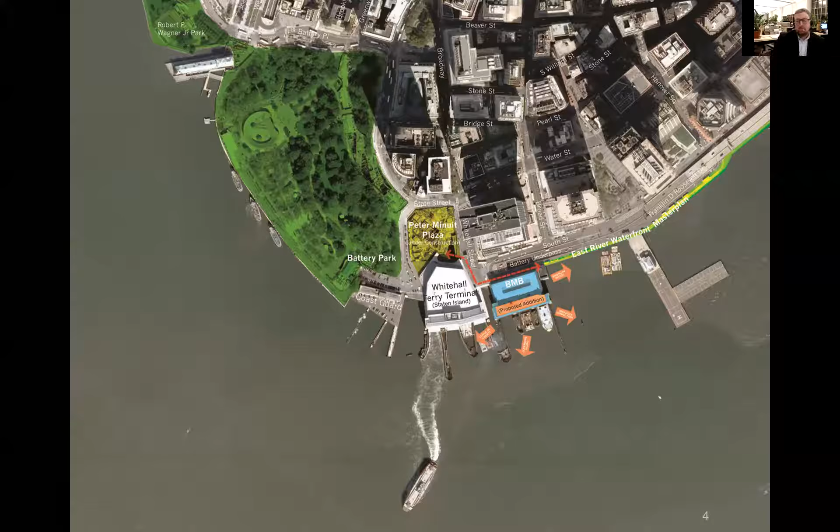So I'm going to walk through. First, it is really a story of the New York City waterfront and its long transition from industrial to recreational use. The BMB sits at the foot of Broadway at the southern tip of Manhattan, directly adjacent to the Staten Island Ferry. I'm going to walk through a little history next to help contextualize the building and the place, and plus, who doesn't love old black and white drawings and photos?

I know I do. New York City is an archipelago of islands. New York City has 520 miles of coastline, which is more than Los Angeles, San Francisco, Miami, and Boston combined.

It's really a city born of the water. The center of commerce was always the edge of the city. This wonderful view of New York Harbor from 1883 shows our site seated right at the foot of Broadway.

We all know Manhattan was settled from the southern tip up, so really it's the front door to the city. And I'd like to point out in this view that there's ships of all sizes and uses, not just commerce, but transportation, and in addition, ferries. It was really an ideal mode of transportation in this water city, especially in areas not served by mass transit.

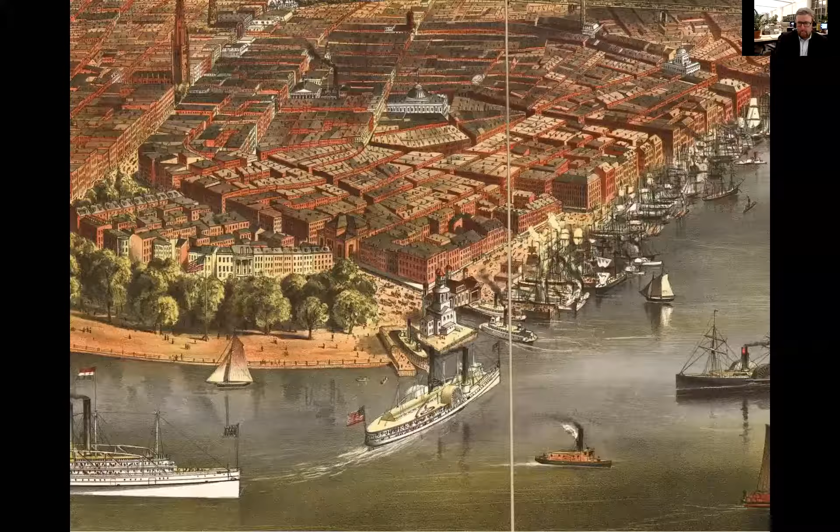Note the Brooklyn Bridge, the only bridge crossing the East River at that time, plays a role in the BMB later on. Zooming in a bit, we see the Battery Maritime Building site. And I have a quote from Herbert Halberg, who was an LPC commissioner who designated the building in 1966.

From the city's founding, the lower tip of Manhattan has always been a focal point for ferry activity, and that's played a vital role in New York City's growth and development. So the Battery Maritime Building was not the first ferry building to occupy this prominent site. You might say New York's first site.

In 1904, there were 147 ferry boats in operation in the waters around New York City, and the tremendous turn of the century boom, growth, fueled by invention, industry, and ambition. So many of the city's greatest landmarks were built during this period, and among them, the BMB. So it was a time of great investment in civic transportation infrastructure.

You see here the many bridges that occurred around the same time. The Battery Maritime Building was built in 1909, Pennsylvania Station in 1910, and Grand Central in 1913.

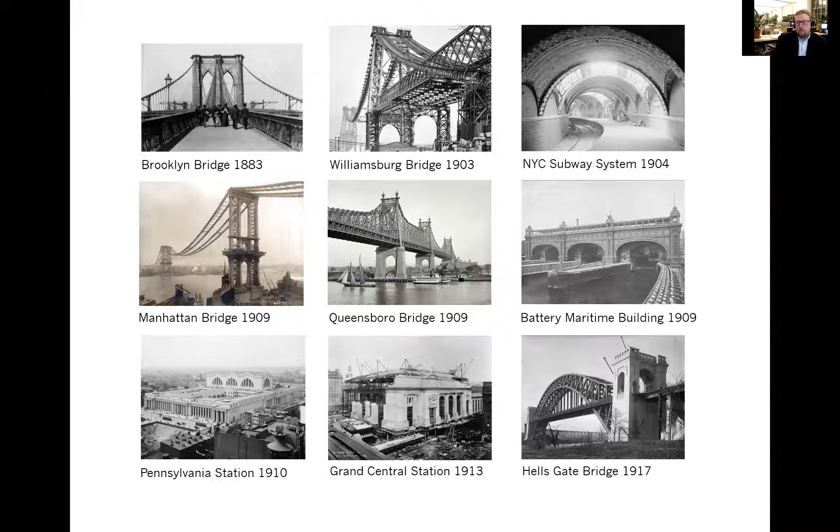Just to measure the magnitude of the Battery Maritime Building's importance, I like to imagine for a moment, if you would, that Grand Central Station has been dormant for 50 years, unused, falling apart, and was set to reopen. That is what we have at the Battery Maritime Building. But I'm getting a little ahead of the story.

In 1905, the municipal ferry system was established. There's a great book by Brian J. Cudahy, who authored Over and Back, the History of Ferry Boats in the New York City Harbor, and he referred to this time frame as a progressive takeover of the ferry system.

So the city acquired the Staten Island ferry route, along with many others, and it began to build ferry terminals all over the city. Notice here the 2 levels on the ferry boat. This plays into the BMB's design that we'll get to in a little bit.

And here it is. It was originally called the Municipal Ferry Terminal, and there were 7 slips altogether. The architect was Walker and Morris. This was their proposal in 1906.

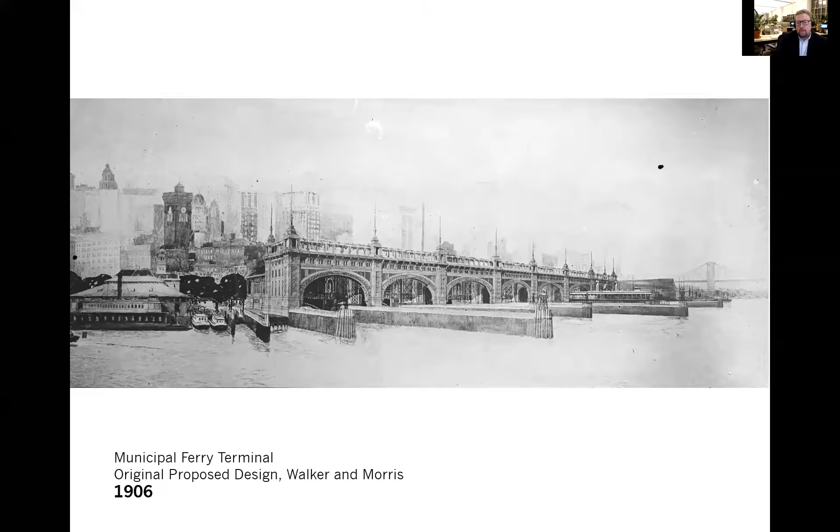The Municipal Ferry Terminal is one of those straightforward but grandiose titles, just like Grand Central, and it's really the only name that it needed with such a breadth, an impressive character. A massive 7-slip complex, the largest of the kind in America. And it was wonderfully detailed, as you'll see.

But it was never fully executed. A grand vision by talented visionary architects on behalf of an ambitious and powerful, growing city, but it was never fully realized.

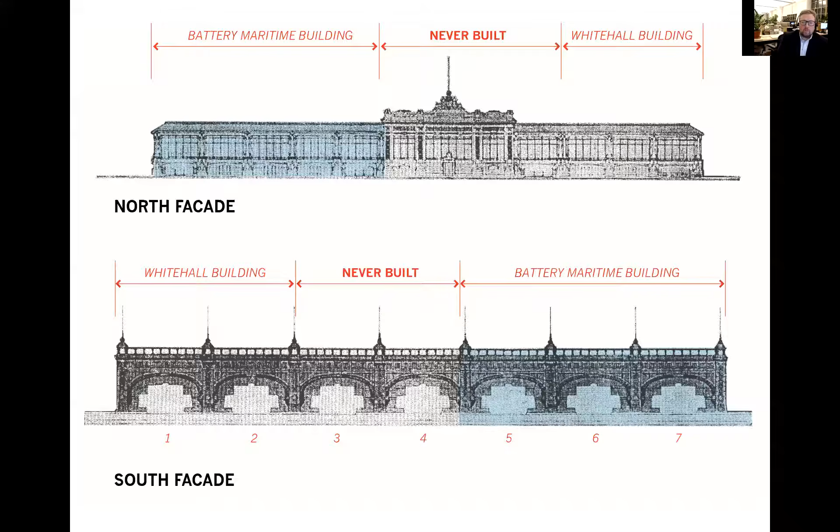The slips 1 and 2 were built, the Whitehall building, which was operating the Staten Island Ferry Terminal, and then slips 5, 6, and 7, which later became or was renamed the Battery Maritime Building. The middle was never built. So looking at this diagram, you have to understand first that BMB is just a fragment of the original intent, and because of that, the west facade in particular was always temporary, meant to connect.

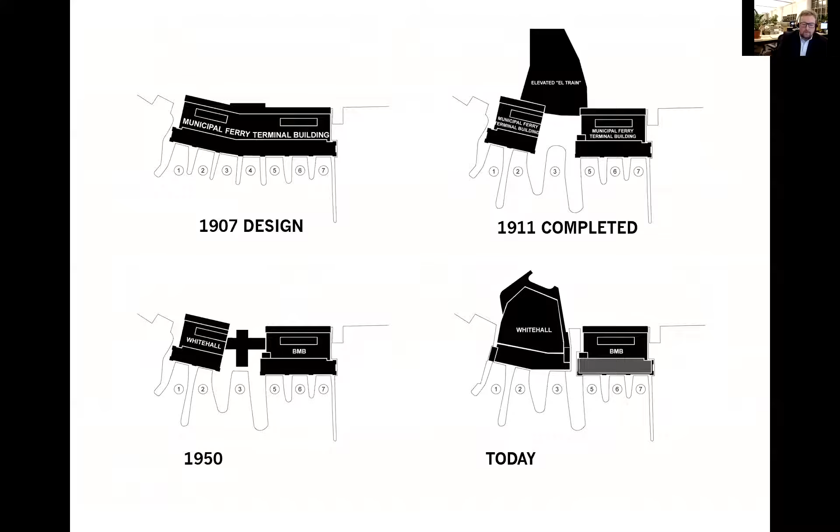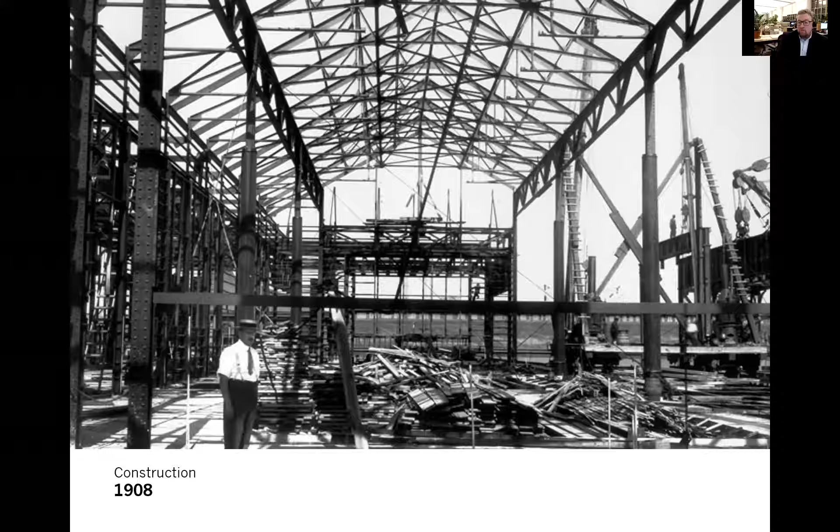This is the view of the Great Hall under construction. It was built between 1907 and 1909 by the Department of Docks and Ferries, who later became the Department of Docks and then the Department of Marine and Aviation. And then finally today, the ferry operations are run by DOT and EDC.

I'm just going to walk very quickly through some plans. There's very few original drawings that remain. In fact, if you look close, these are actually plumbing plans. The ground floor is really a machine for loading ferries.

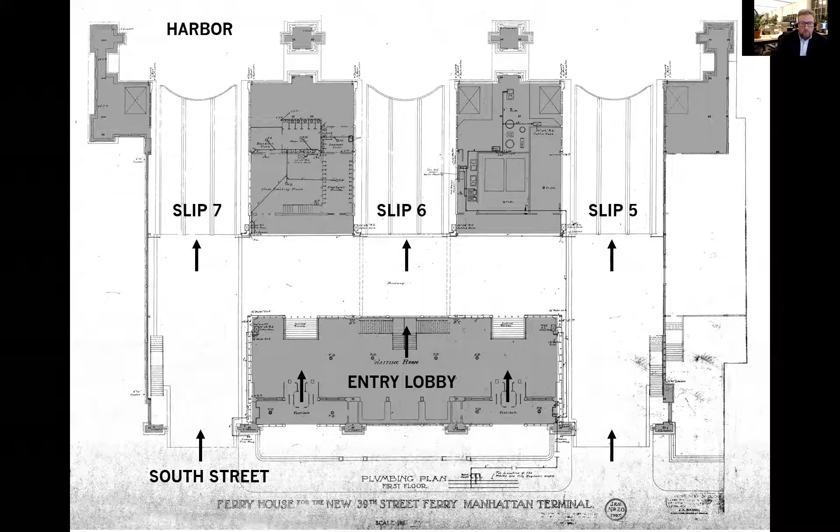Horses and automobiles eventually entered slips 5 and 7 and could travel underneath the building to access 6. And then people entered at the ground level and went up into the second floor, which is really the grand civic space for people. The light gray in the middle is the Great Hall, which was the only heated space on the second floor, and just for ticketed passengers. The concourse, the donut that surrounds it, was unheated, and it was disconnected at the ends to separate the ticketed and non-ticketed passengers.

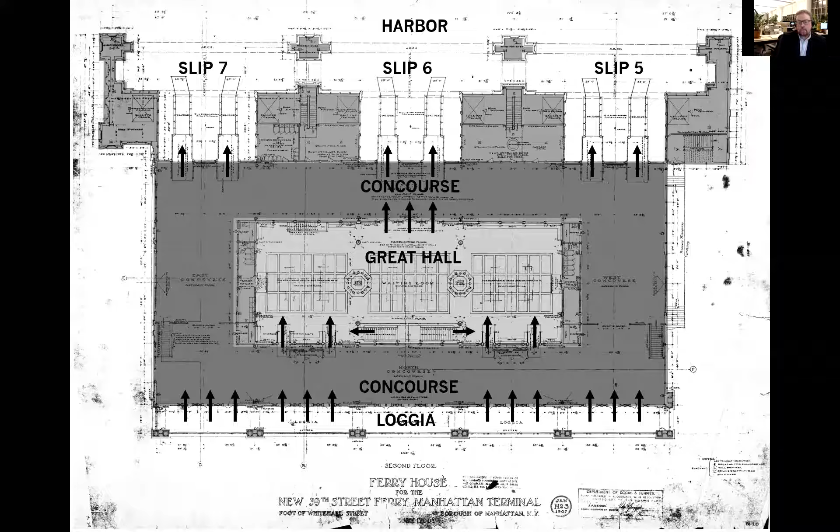Passengers boarded the ferries at the second level on those gangplank bridges you saw earlier. Here's the section, city side to the right, harbor side to the left—a brilliant concept to bring the public up to the second floor. I also want to point out the rooftop recreation pavilion, which reflected the new promise of fresh maritime air and health, a public space where people were invited to take in the views and fresh air.

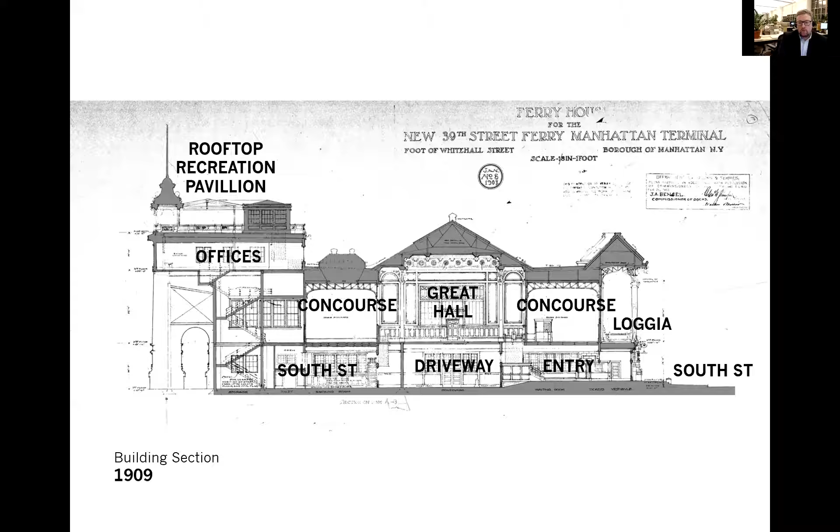Also notice there's a generous pedestrian podium with graceful cascading steps down to the street. Of course, soon enough the cars began parking on that, as is always the story.

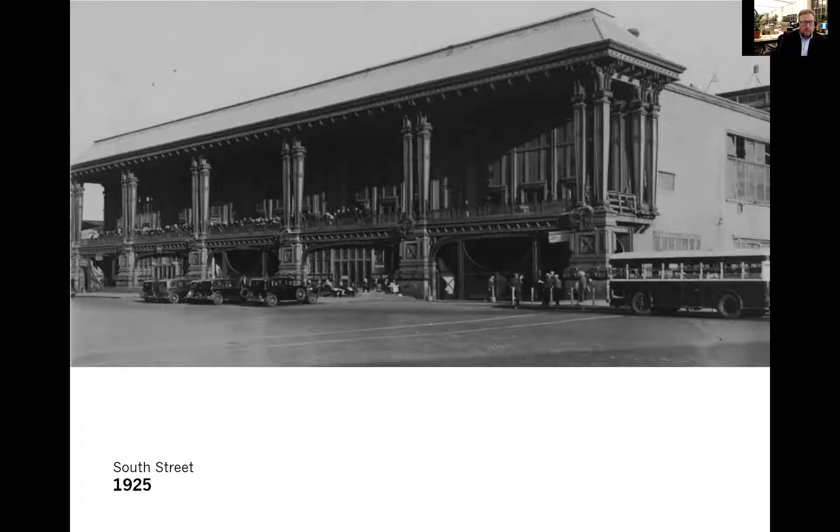Here's the first place where you see the western facade, which was always meant to be temporary. You can see it looks incomplete and undetailed compared to the grandiose five-bayed loggia you see here.

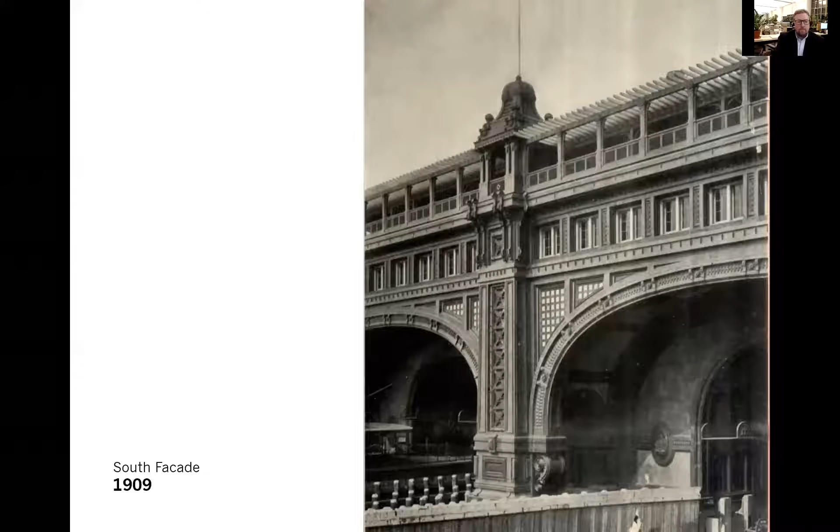They had a dozen routes to all 5 boroughs and New Jersey. And here's another quote from the LPC designation report: 'Viewed from a ferry boat approaching the tip of Manhattan, the monumental arched openings of the Municipal Ferry Terminal at the mouth of the East River appear like 3 tunnels opening into the canyons of the city.' I love that so much because these archways are really so gorgeous, and must have been a welcoming sight.

Slips 1 and 2, the Whitehall terminal, serve Staten Island, as I mentioned. Slips 5, 6, and 7 originally served South Brooklyn—Sunset, I think mostly Sunset Park. I think there might have been something in Red Hook as well.

But the black and white photos really don't do it justice. The building was gorgeously colored in various hues of green, yellow, and blue tiles—a really remarkable structure, its style known as Beaux-Arts structural expressionism.

The architects used the structural rivets and trusses decoratively, with great originality and boldness, so you really do not see architecture like this anywhere. It's reminiscent of, and probably its closest relative is, the French Exposition buildings of the 1889 fair, including the Eiffel Tower.

Its ornate embellishments are replete all around the building: scrolls, panels, rivets, cross bracing, brackets, rosettes, maritime-themed features. Really remarkable details—Guastavino and painted tiles, and creative, unorthodox column capitals. It's not quite sure if it's Corinthian or Doric—it's a style into its own.

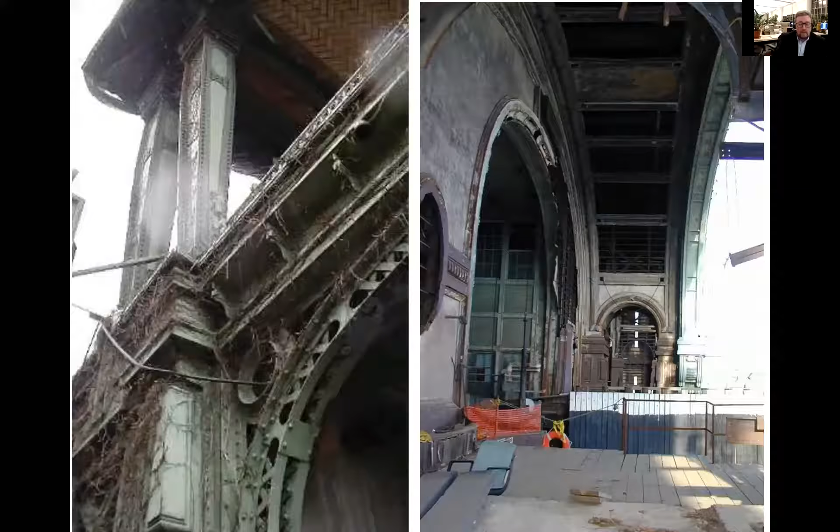Nonetheless, by the 90s, the building was in critical condition. All its color gone, significant pieces literally falling into the water. The new century inspired a return to the waterfront.

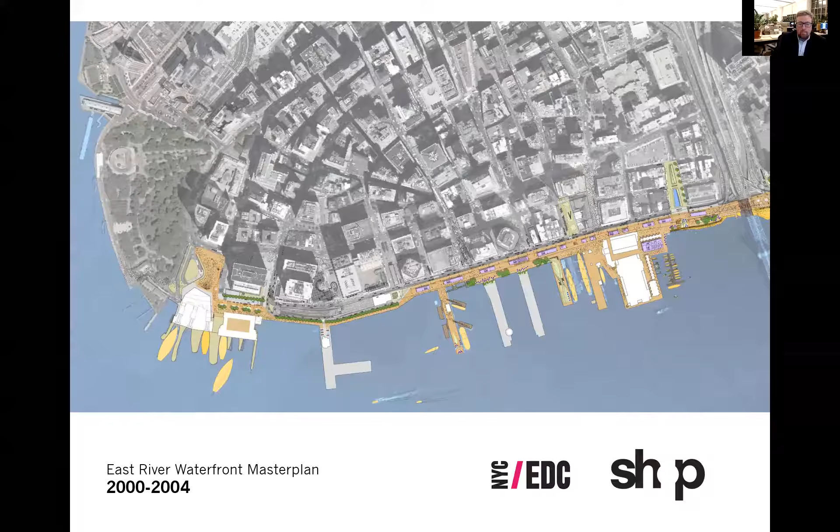The city came to the rescue. The EDC brought SHoP Architects on board to do a master plan for the East River waterfront. The plan included a concept to correct that overzealous automobile infrastructure, which lidded it over and moved the tunnel to the east. This is a project I posit is still valid and should be done someday.

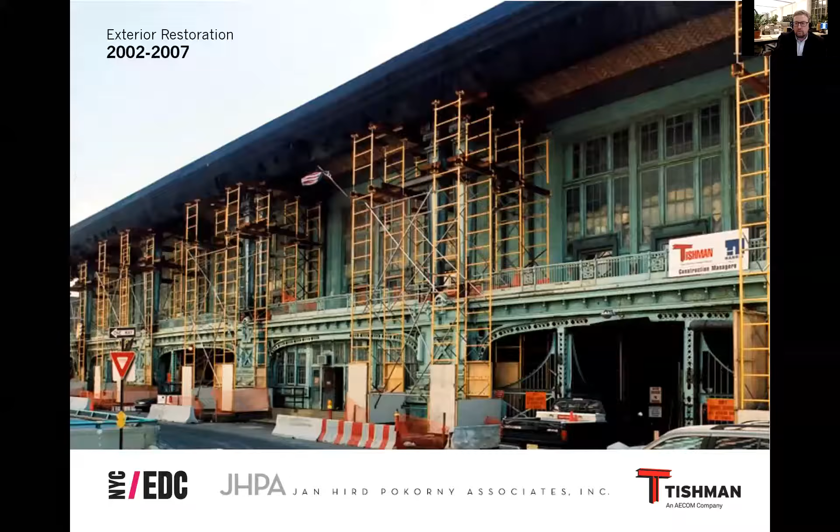And then EDC engaged Jan Hird Pokorny's office to perform an extensive restoration of the exterior envelope, including the roof. They did a wonderful job directing the disassembly and reassembly of the complex facades, which are composed of an intriguing composition of architectural metals, including cast iron, rolled steel, stamped zinc, and copper.

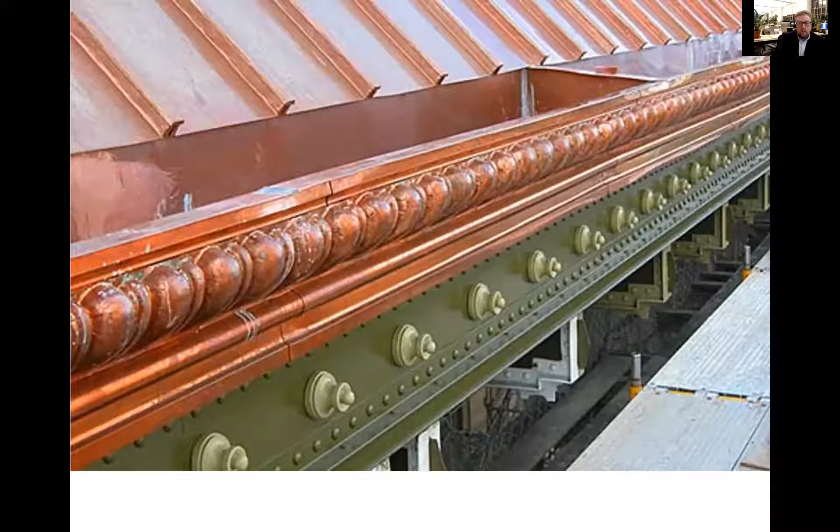With Jan Hird Pokorny's skillful work, what did we do in the building? There was an excitement building, and in 2008, David Byrne even had a creative time installation called Playing the Building. This is in the Great Hall, where he literally hooked up a piano to the hammers and pipes and things around the building. So he was literally playing the building, which was really fun.

But the building now had a new exterior renovation, but no uses on the inside, and it was still really rough. So they put out an RFP for a private developer to develop the building for new uses, and perform the work at their own cost, which turns out to be a significantly larger investment than the exterior shell, and in return receives a long-term lease to operate the property.

So a public-private partnership has been successful around the city. Marvel Architects, then Rogers Marvel Architects, working for the Dermot Company, helped secure and win this bid. And we got to work to answer the central question: how to reactivate the building, which needed a new economic engine to preserve the building into the future.

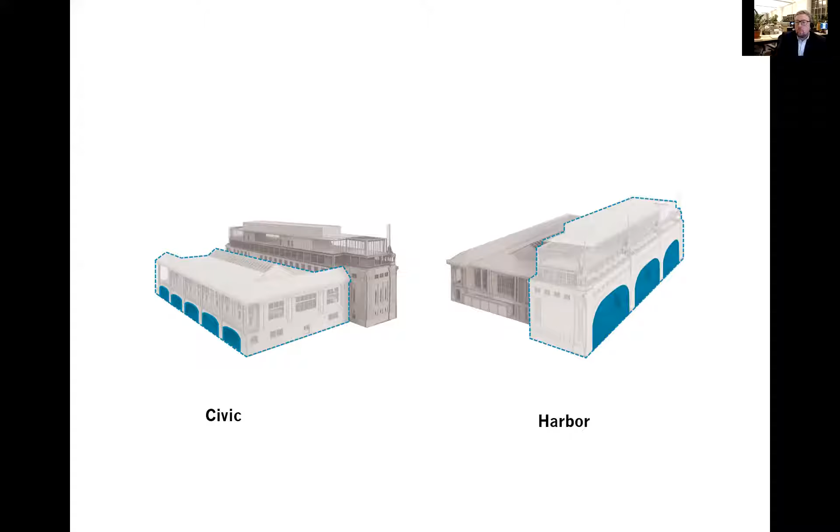So we got to work analyzing the building. The first thing to understand, the BMB is really two buildings: the five-bay, two-story civic building facing South Street, and the three-bay, four-story harbor building facing the water. Really distinct structures in many ways.

The other thing to know is large areas of historic envelope were left unimproved from the exterior work, and these were opportunities for intervention. Still an active ferry building, boarding only occurs at grade now, not on the second floor, but the Trust for Governor's Island operates slip 6 and 7, and a water taxi in slip 5, and it's a MARSEC level 1, so there are security concerns there.

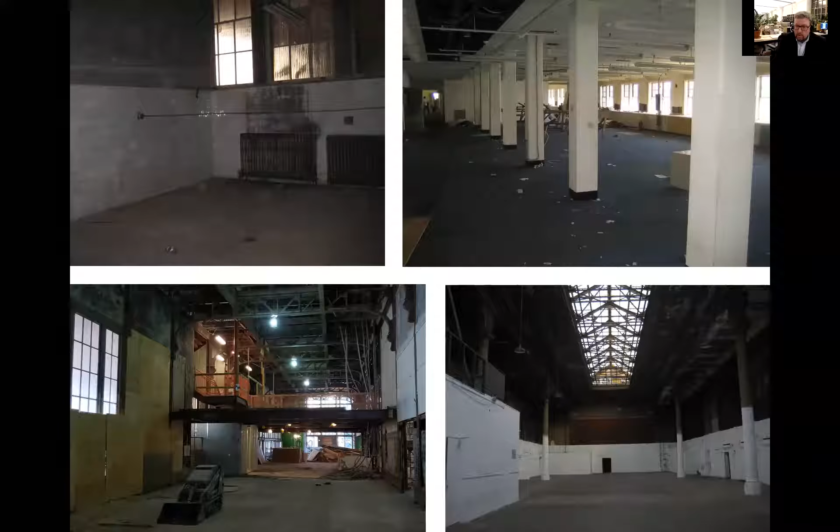The interiors themselves were full of potential, clearly, but dark and frightening spaces, and more importantly, there was inadequate egress, infrastructure, fire protection, lighting, acoustic isolation, everything, challenging layouts, insufficient floor area. But you got up to the roof and there were incredible views, really unparalleled, and difficult to appreciate with the small windows on the 3rd and 4th floors. And remember, there was that history of a rooftop recreation pavilion that was lost.

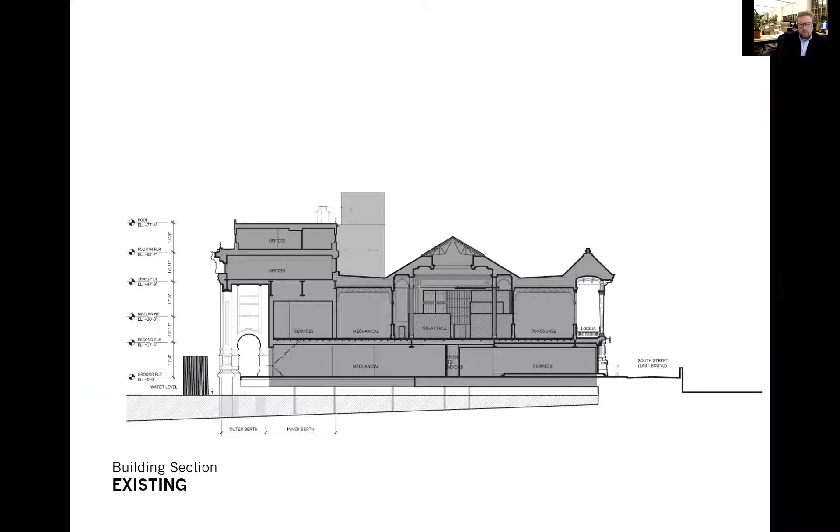So as the development team was looking to capitalize on this and expand program opportunities, the first idea was to add a story to the water side of the building. And we had to be careful that it was not visible, and it had to be sensitively done.

This is a program section.

I'll talk briefly about the use. The present intended uses are all to be operated by Cipriani, the wonderful restaurateur and host of so many properties in the city that you know. They're operating all aspects: there's an event space on the second floor in the Civic building, a hotel on levels 3 and 4, and a restaurant bar on the 5th floor. So 3, 4, and 5 are all in the Harbor building, and the event space is in the Civic building.

We were careful to ensure that these new uses all satisfied the Secretary of the Interior standards, which state a property shall be used for its historic purpose or be placed in a new use that requires minimal change to the defining characteristics of the building, its site, and environment.

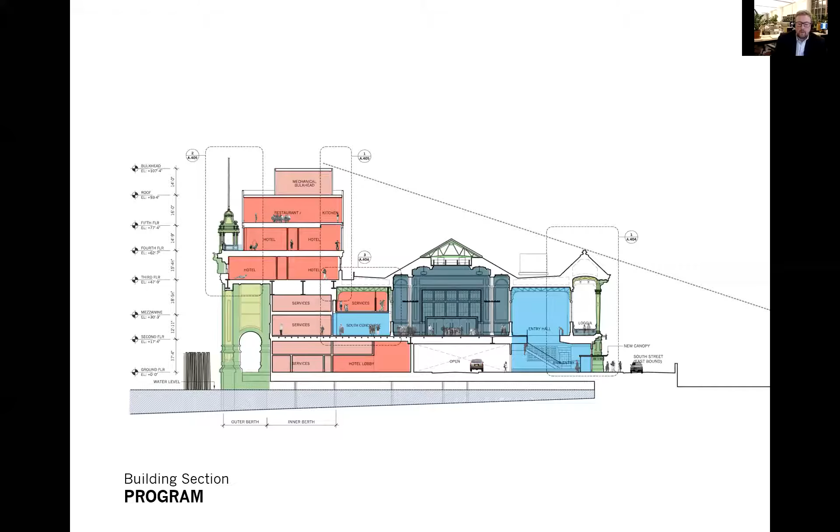There have been 3 different developers and 3 contractors since the adaptive reuse construction began in 2011, so each had their own ideas about the uses, finishes, layouts, and execution. Each negotiated with the city. The current and final developer is Midtown Equities, who hired us and has shown a remarkable commitment and dedication to the property. They deserve a lot of kudos for the investment they've done.

So to add the 5th story, we first had to look at the foundations, and that meant we waited for low tide, put on our hip waders, and jumped under the building. The entire building is over the water.

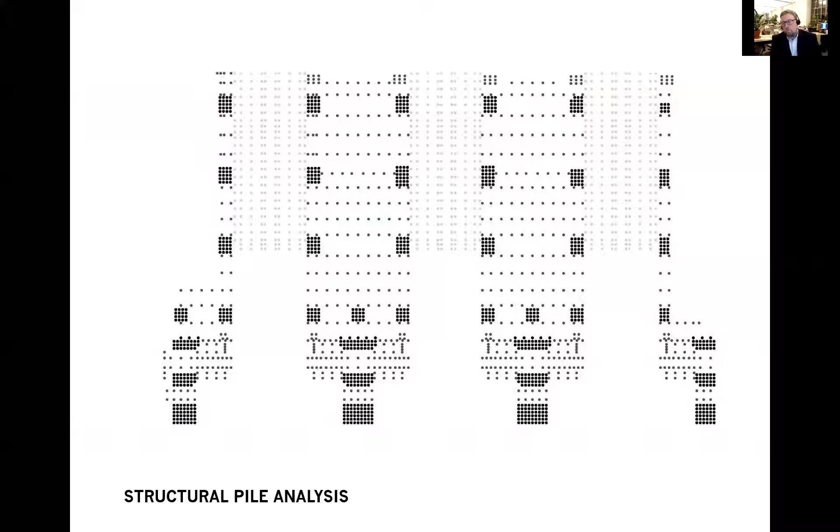Our longtime partners at Silman Structural Engineers performed an analysis, and we quickly learned that there's 200% more piles per square foot at the roof addition area, so it was an obvious place to put an addition. They performed a structural model to verify the additional capacity and determine the load path.

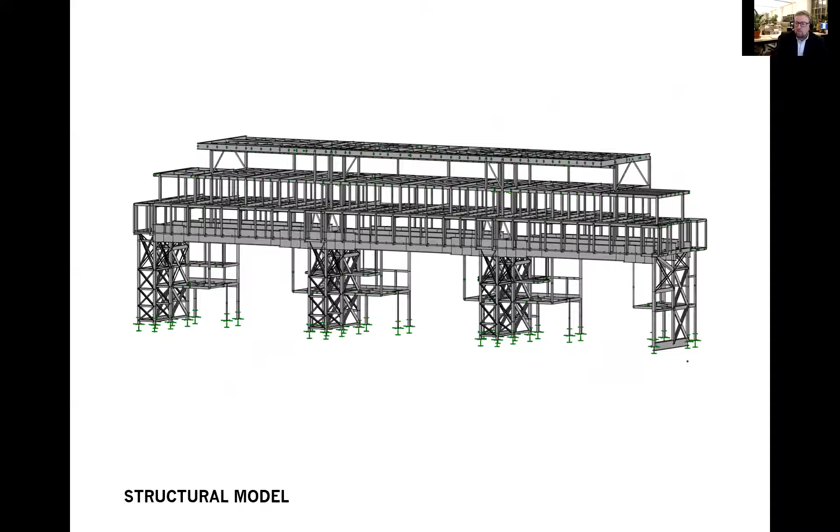Typically, framing gets easier as you move up in a building, but in the Harbor building it's reversed, because the top floors are basically spanning those great arches.

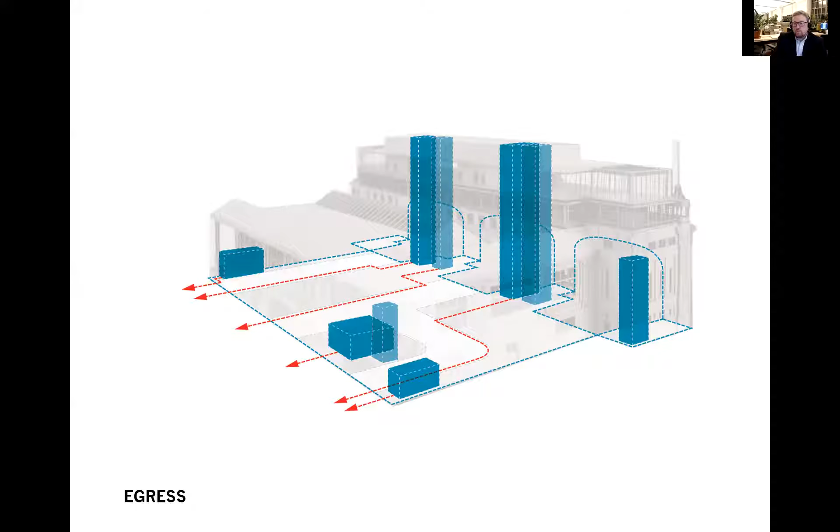Then we had to develop a plan to provide safe egress pathways to the street, bringing in new stair and elevator cores and bringing it up to modern life safety needs. That was a great challenge, needling these through the small amount of space between the arches and the great east-west girders that span them.

And finally, there were the architectural and aesthetic concerns. How do we responsibly add a story to the building, satisfying the stringent and complex historic standards from SHPO, NPS, and LPC, to which we were legally and ethically obligated?

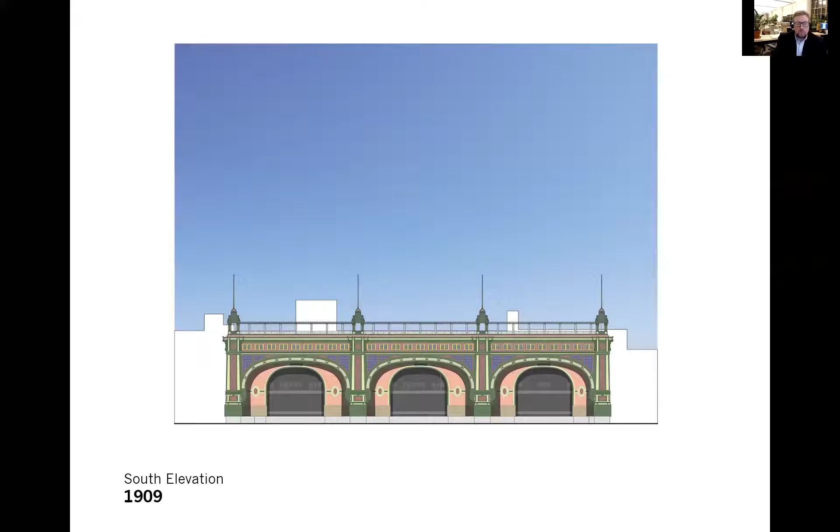We were, of course, struck by the bold celebratory skyline created by the cupolas and pergolas. But the BMB had lost its skyline profile over time as the city grew up behind it and the cupolas and pergolas were removed. So we proposed to reconstruct the 4th floor cupolas and pergolas, and then contrast with a minimal modern glass curtain wall on the 5th floor to reflect and basically restore the sky space.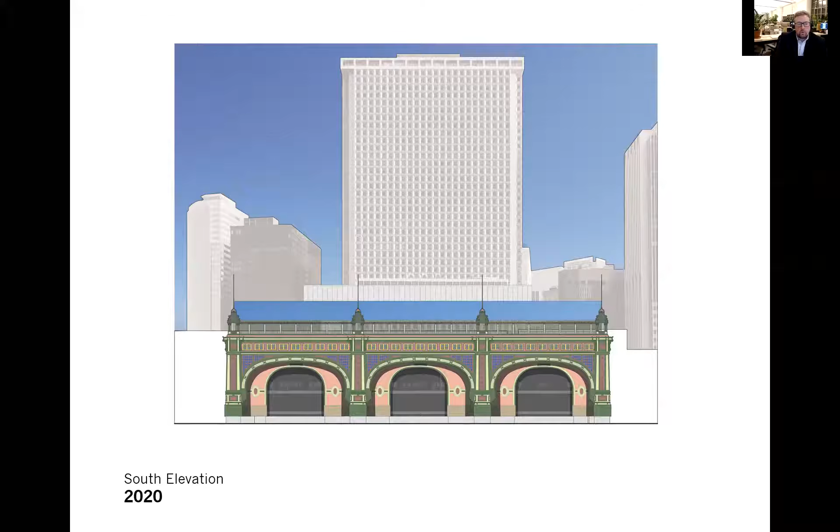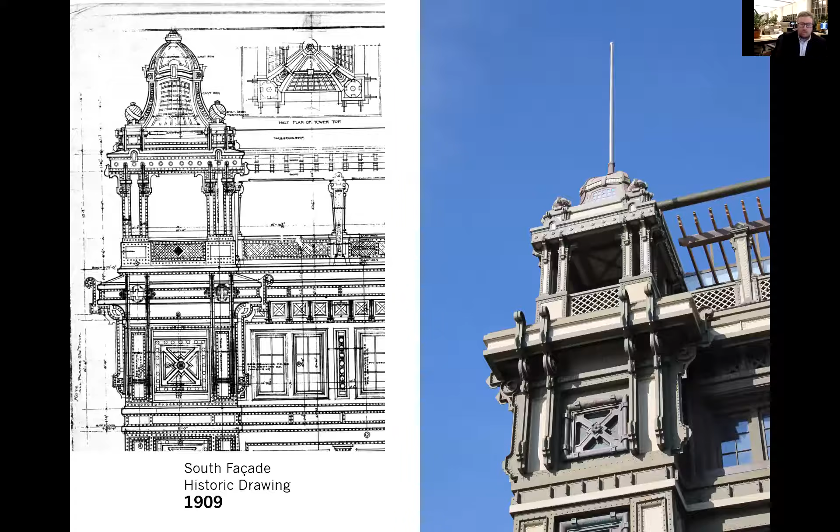We were fortunate that among the few drawings we did have were the cupolas and pergolas, so we were able to faithfully reconstruct those details with modern materials and methods. You'll note throughout the presentation there are a number of different methods we've used, from reconstruction and preservation to restoration.

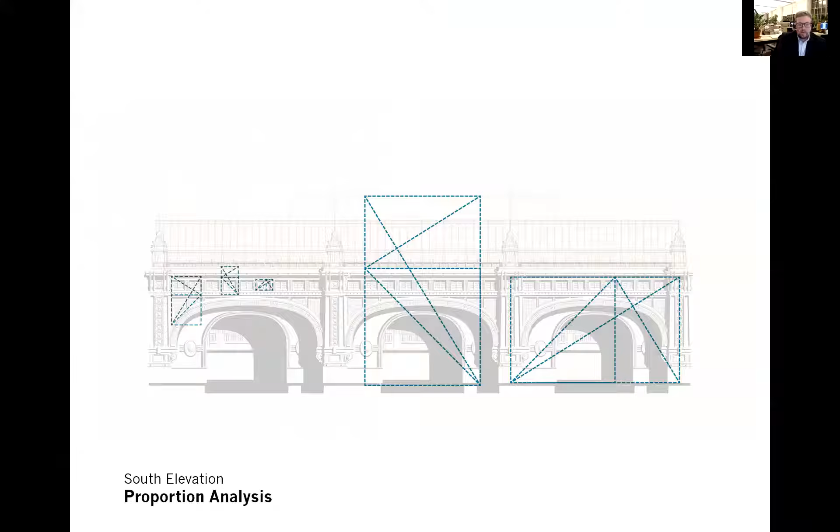We also did proportion analysis, and were delighted to find the golden section replete in the building, and what we call the rhythm analysis—a certain kind of repetition and rhythm that happens in the building that contributes to its rich character. We were careful that our new addition had enough sympathetic DNA that it felt it belonged.

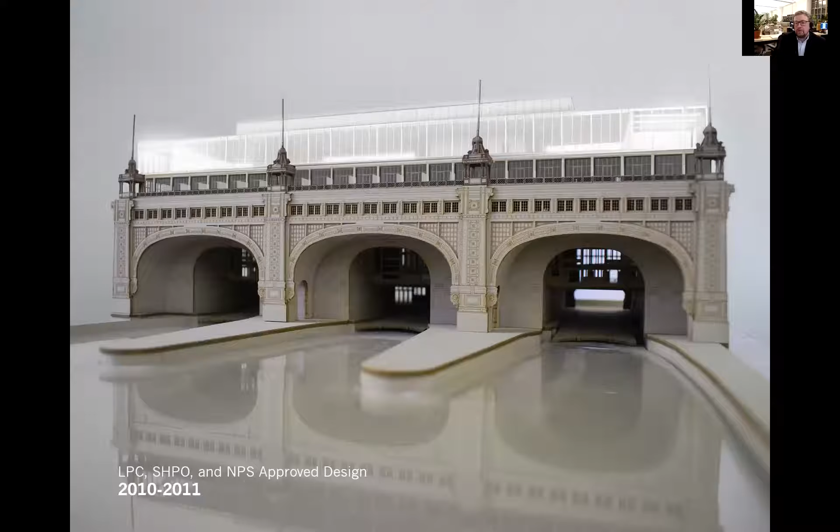After a long and lengthy public process, the design ultimately achieved community support and agency approvals, including with the State Historic Preservation Office and the National Park Service, who awarded us significant historic tax credits to help offset the construction costs of the project.

The cupolas and pergolas are really visually identical to the historic ones, and the bold arched forms stand in marked contrast to the other rectangular shapes of the building behind. The horizontality of the building and the addition also helps it really stand out from the harbor view.

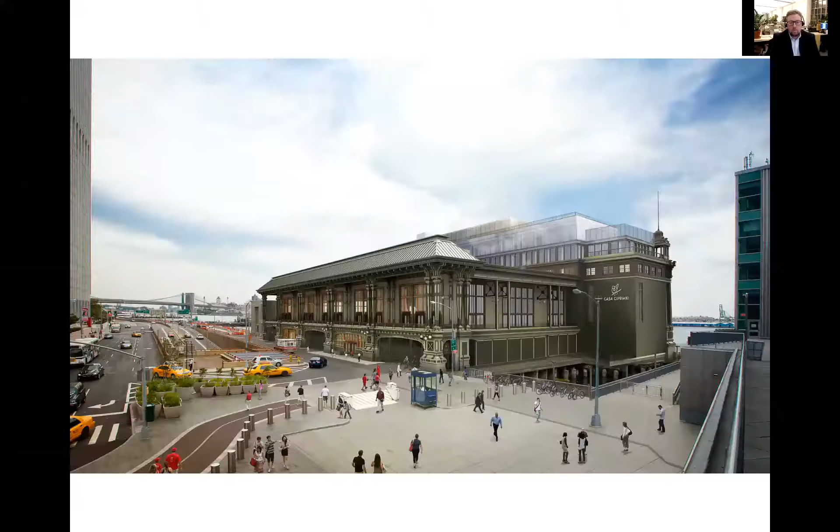Rotating around the building, we now see the north and west facades. The west facade was an effort of restoration, retaining materials from the most significant time frame, but we were allowed more reimagining there on how to recreate that.

The north facade of the Civic Building was primarily an exercise in preservation, retaining and repairing the existing fabric. We did add a canopy and a sign at the main events lobby.

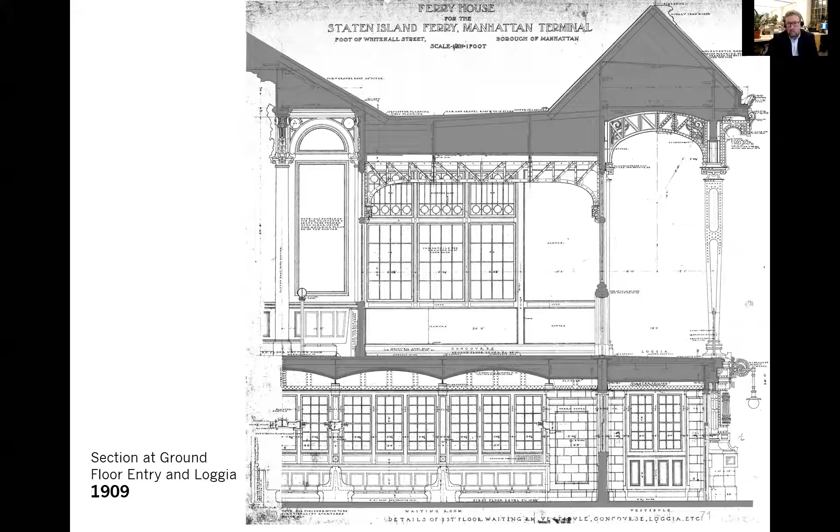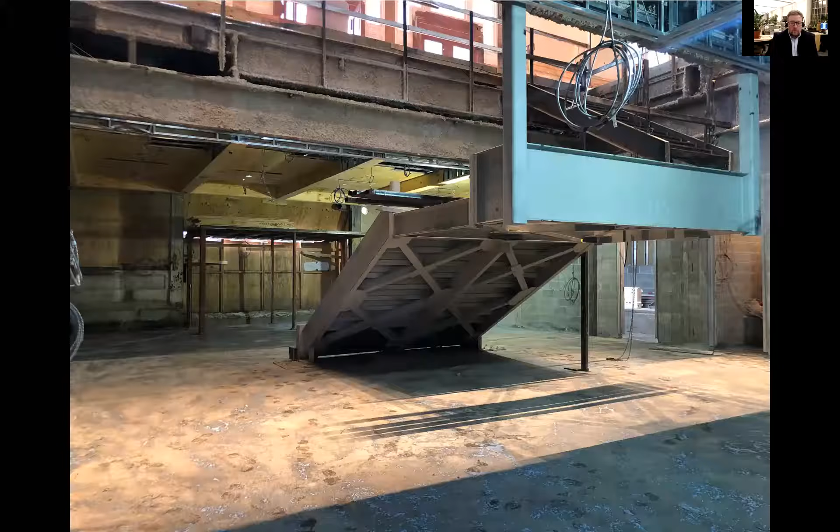Now on the second floor of the Civic Building, we're in the North Concourse, the outer ring of the donut, the loggia to the left, the Great Hall to the right. Again, this was historically untreated space, and it was pretty roughly finished too.

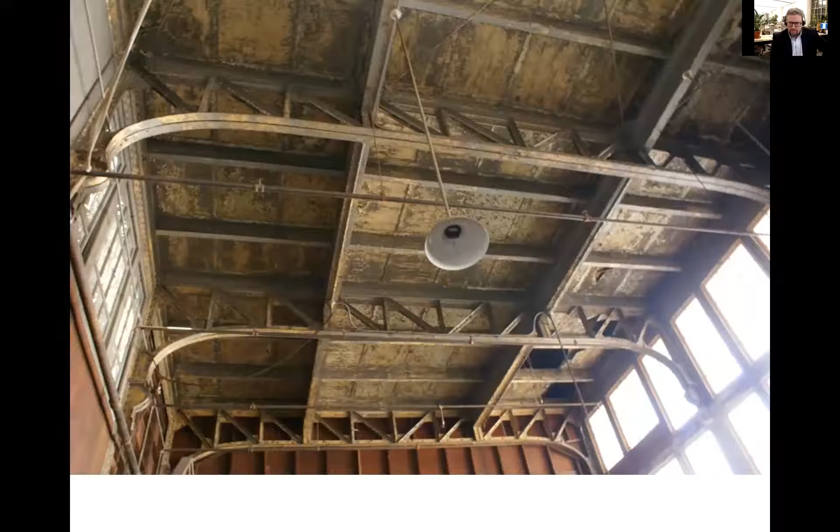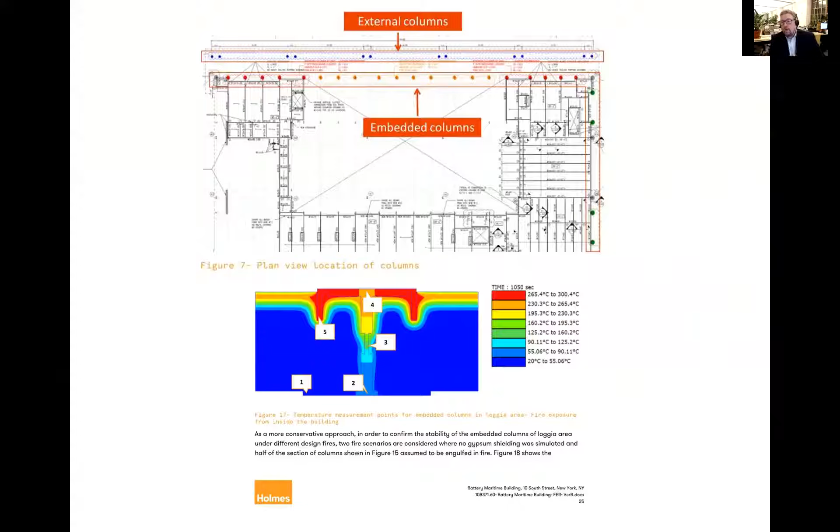Obviously, over time, it was completely stripped. The important thing here was the steel. The code requires structural steel fireproofed with spray or expensive intumescent paint. But here our steel is both structural and decorative, so we performed an active preservation, ensuring the original design remained, and a fire analysis to simulate structural performance during a fire, which allowed us, along with a creative sprinkler system from our friends at EP Engineers, to convince DOB to permit us to leave much of the structural steel exposed.

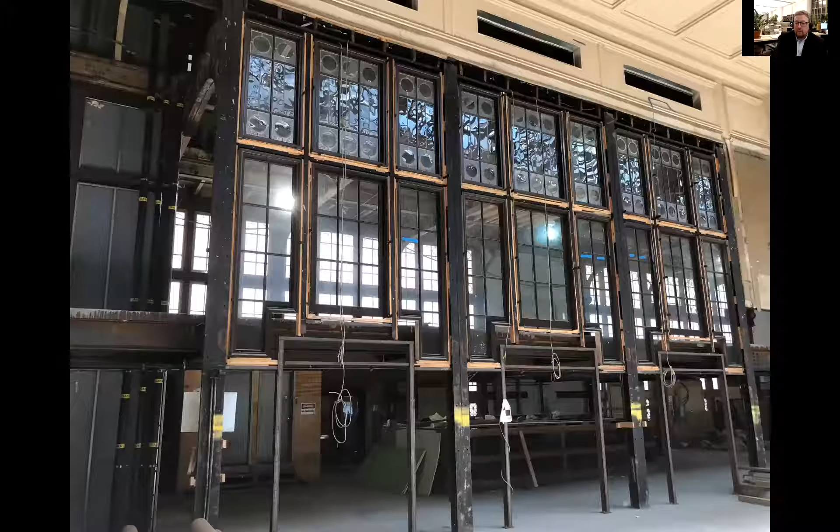Because the building was over exterior space, we had to add radiant heat to the floors. This was the condition of many of the walls, which needed acoustic and AV wiring, quite complex. Many of the things we're proudest about you no longer see because we integrated them in rather unorthodox ways to make the building still read as it wanted to, as it did.

So here's that finish wall. The windows and doors were really a mix of preservation and rehabilitation. And here's that larger North Concourse space as it appears today, with the Great Hall stair coming up it.

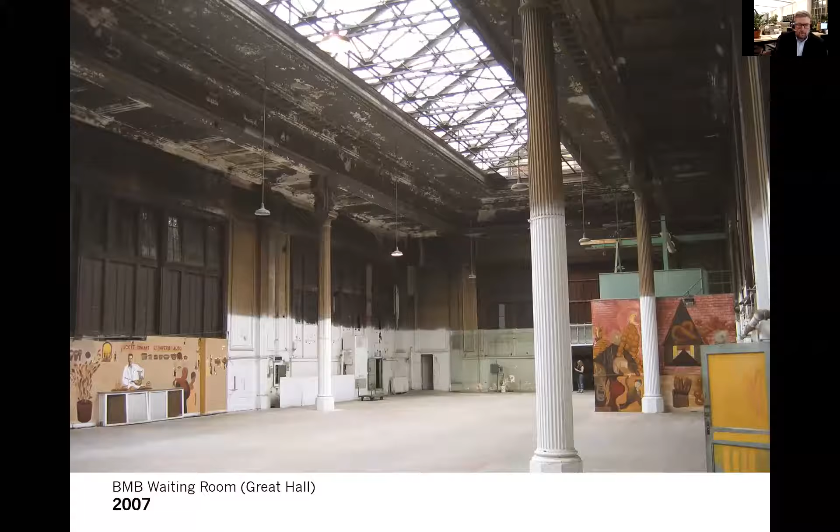Entering now into the Great Hall. Here's a 1910 view. It was heated, had a concession booth, wood benches. Here it was in 2007. Plaster work remained, but the lay light was lost, doors lost, cast iron.

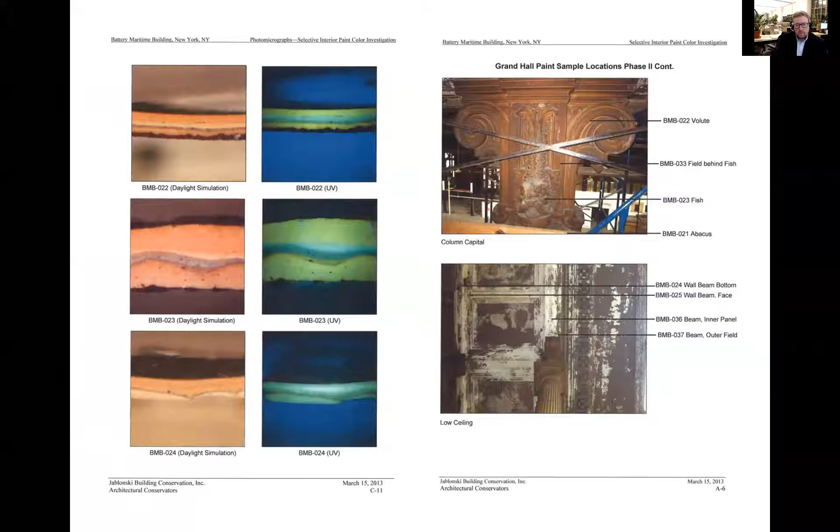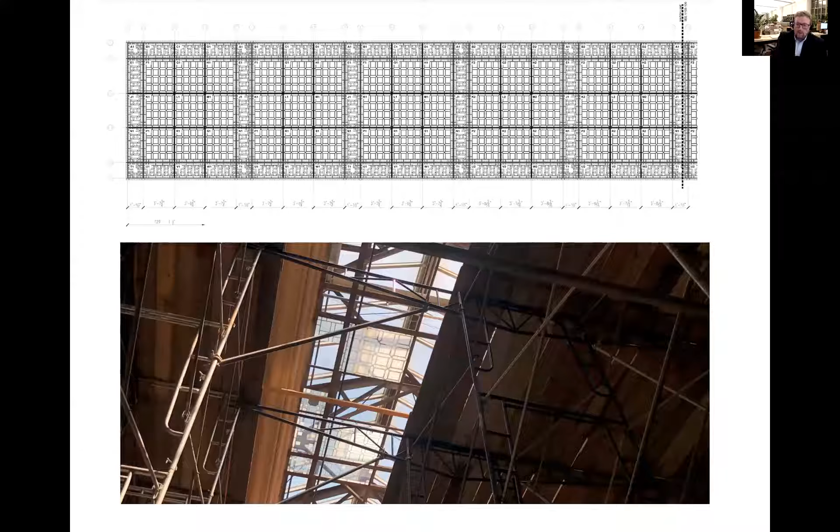We used a mixture of drawings and photo micrograph paint color investigations. We reconstructed the lay light from photos using modern safety glass and did multiple samples to test the effect and reinforce the steel. This is up on the catwalk looking closely at that lay light, which we believe is really successful and beautiful. And here's the Great Hall as it is today.

The Civic Building is effectively completed now and ready to reclaim its rightful place as the crown jewel of the New York City waterfront. The carpets and the lighting were by OTD, the Office of Thierry Despont, interior designers, and Schwinghammer Lighting. There's very few 9,000 square foot event spaces downtown.

Before COVID happened, Cipriani was fortunate to hold several initial events, and they transformed the space each time with their great artistry and magic and dedication to gracious service to create these really magic environments. And each time the guests enter with a sense of awe that this building has been unseen in plain sight for so long.

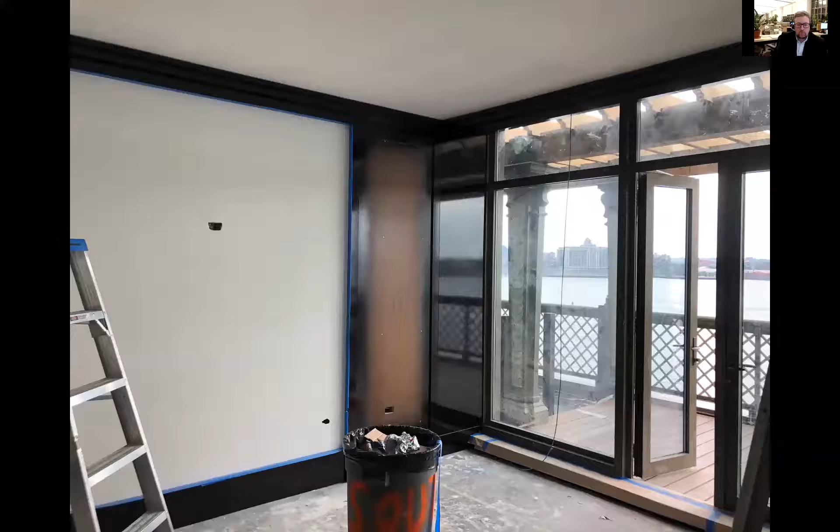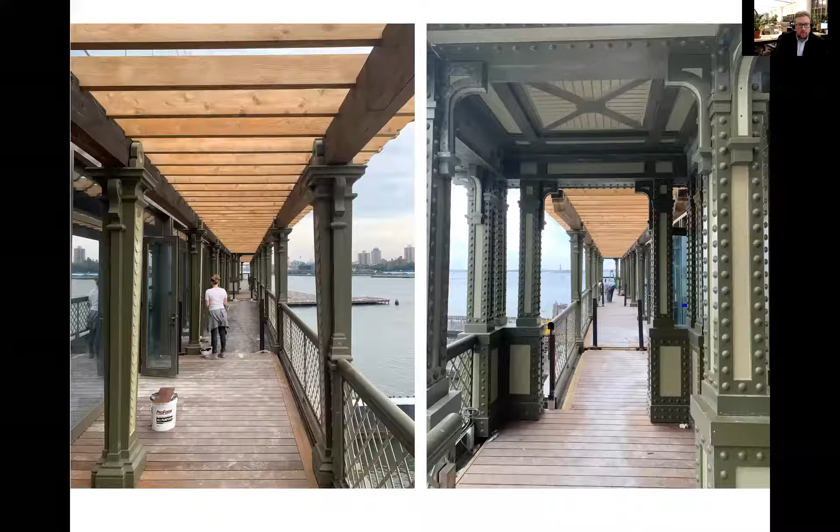I'm just going to step outside again briefly to look back at the Harbor Building. I'd like to show a few more slides of where we are on the upper floors of the Harbor Building, the hotel, restaurant, and bar, which are not yet complete. The hotel rooms are coming along, the pergola and cupola from the fourth floor terraces are also close to completion, and the fifth floor restaurant and bar space with its sweeping views of the harbor.

So this is the conclusion of my presentation.

Again, it's been a great joy to be a part of this building, which I love so much, and I hope that you all have an opportunity to visit and see the great treasure that we have restored for New York. This is the team. I would be remiss not to mention the many people behind this long effort.